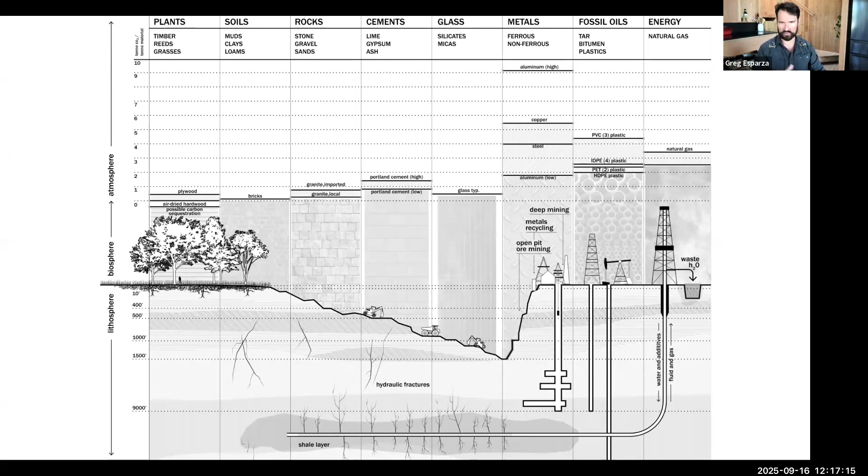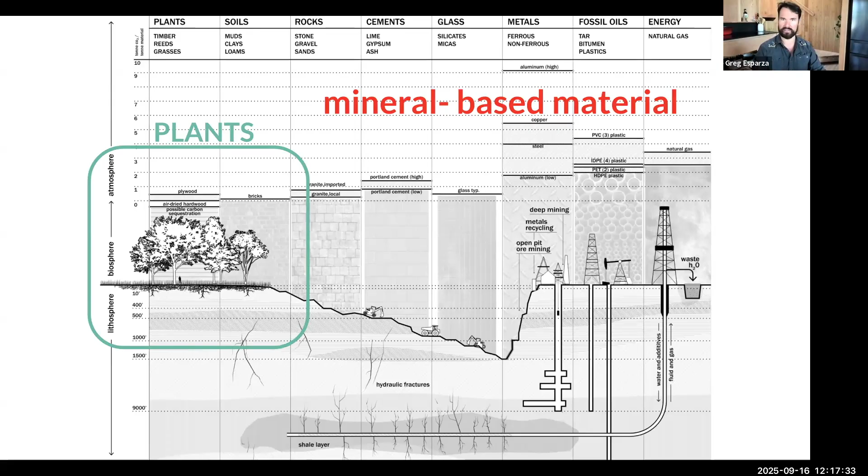So over here on the left, we have our plant-based building materials, and then over here on the right, we have kind of a stair step of mineral-based building materials, concluding with fossil fuel-based building materials, where we're going deep into the earth to extract petroleum. So where building materials come from, to a large degree, shapes a building's climate impact.

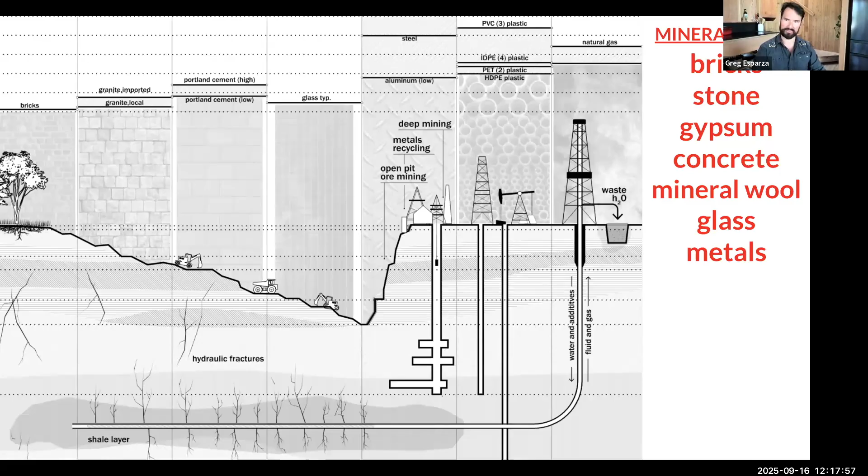So in that mineral-based section, you've got bricks, stone, gypsum, concrete. This is kind of moving from left to right. Mineral wool, glass, metals. And then we have our plastic section. So we've got things like PVC, LVT, polyurethane, latex paint, foams, all these things that are petrochemical derivatives.

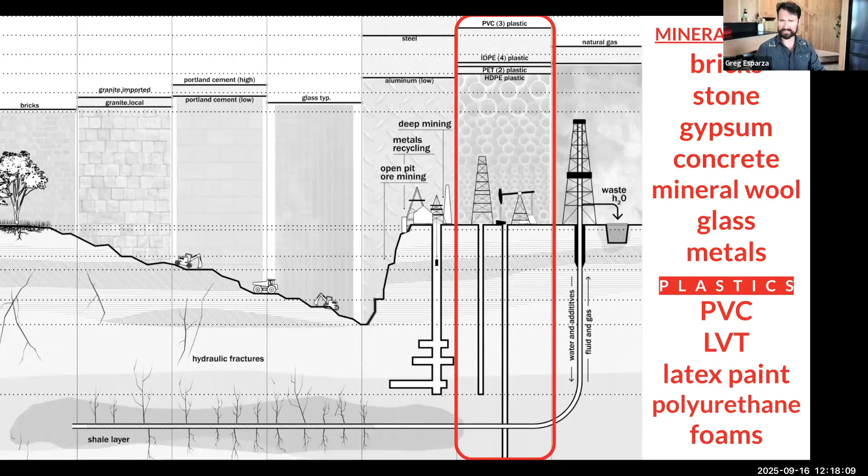Back to that kind of story theme, we've got kind of our farms, forests, and mines classifications here. But really since the 1950s, we had our farms, forests, and mines, but now we have kind of the new plastics addition to the Three Little Pigs plus Barbie Dreamhouse kind of classification of houses.

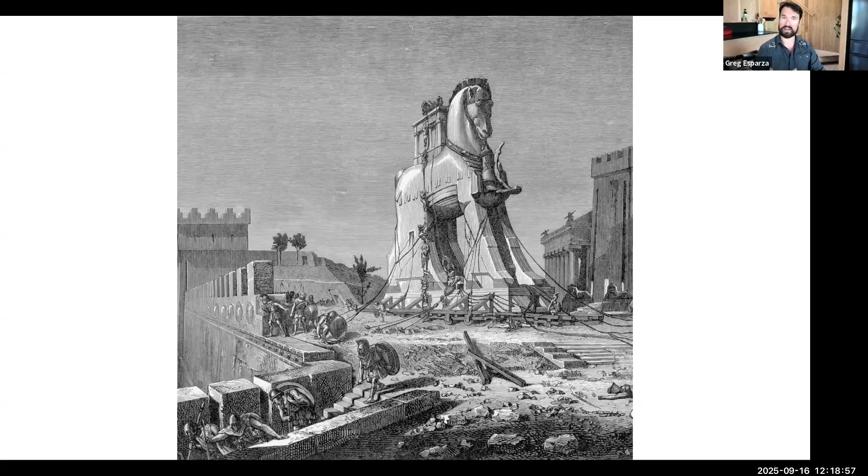Yeah, so the thing with houses is that houses are kind of like a Trojan horse where they're bringing a lot of different chemicals and compounds into the spaces that we live in and breathe in. And plastics in particular, along with other materials like asbestos, back in the day, et cetera. These things are materials that can hide toxics right under our noses.

So as I mentioned, from Austin, I'm a born and bred Texan. So this infographic from Dow Chemical from the 40s is a really nice distillation of how a petrochemical process works. So in this case, it's showing how saran wrap is made. So you've got petroleum and then chlorine, brine, and you have all of these different processes and energy that's put in at these different points

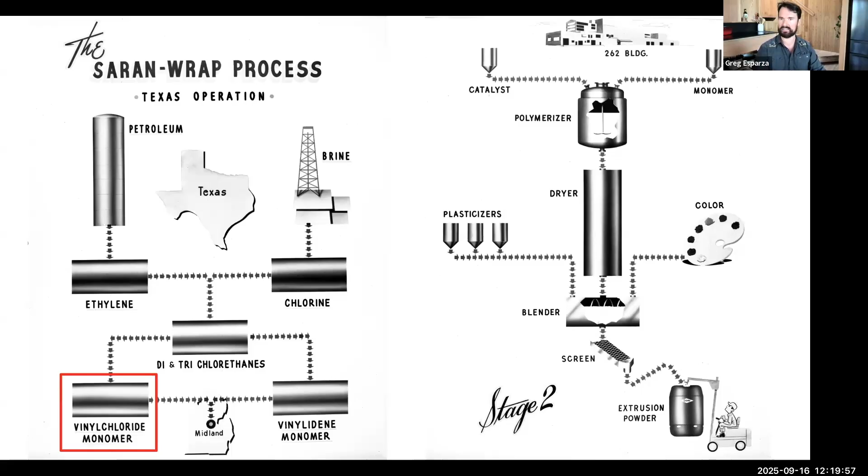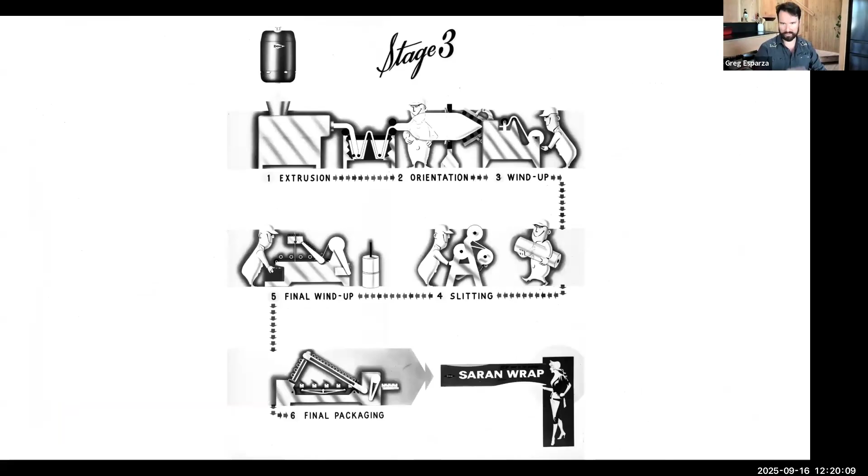working with chemicals at different levels of toxicity. So here's the vinyl chloride monomer. That's the base of PVC, LVT, and this kind of long industrial process that is a really amazing example of manufacturing technology to get to a nice and pretty end final product like Dow Saran wrap in this case.

So as it pertains to building, what happens if I put embodied carbon and health impact of materials first when designing a house? And so in the case of Austin, asking myself this question as it pertains to the Cross Cabin project. So I asked myself, what is our material baseline for a typical home design in Austin?

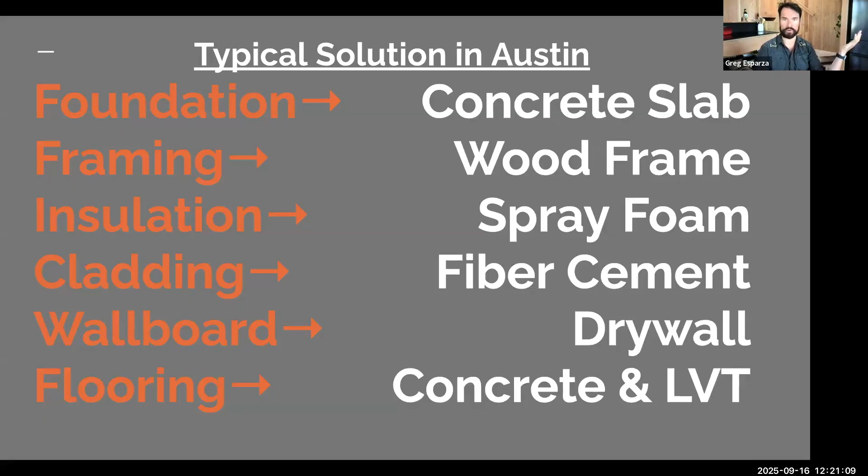So this is a very common spec house. This is down the street from where I am now. And these are the types of materials that are being used. So a typical solution in Austin would be a concrete slab foundation, stick framed. Insulation is most commonly spray foam. Cladding is typically fiber cement, drywall wallboard, and flooring. We're looking at concrete, LVT, some sort of polyurethane covered material. So we got almost all minerals with the exception of the plant-based wood frame.

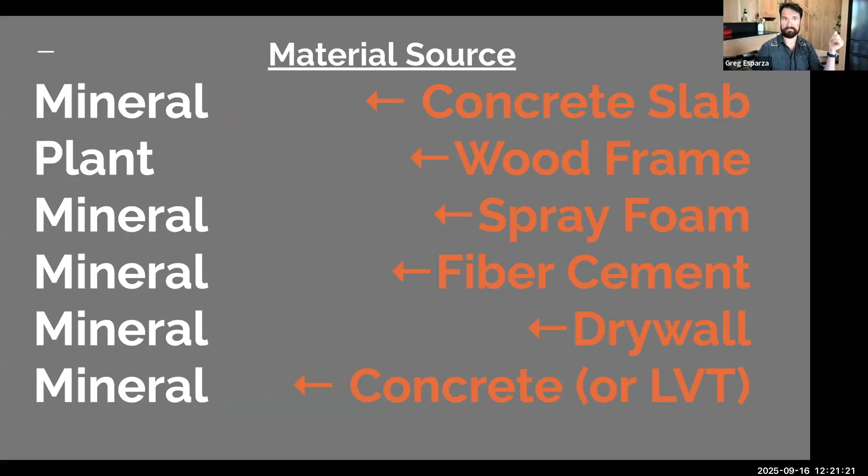So I thought about recontextualizing that for buildings. So what if we build with real materials, not too many, mostly plants? And real here, which I'm adding to Michael Pollan's food rules, is real as in not heavily processed. So like vegetables and wood, not Fritos and foam. And Fritos are delicious, but, in other words, no home Twinkies.

So the approach that I came up with for this project that I'm in right now is foundation using a steel pile and beam system, still a mineral-based product, still high embodied carbon, but we're using a lot less material and it has a high recycled content, very likely to be recycled at the end of its life, even now.

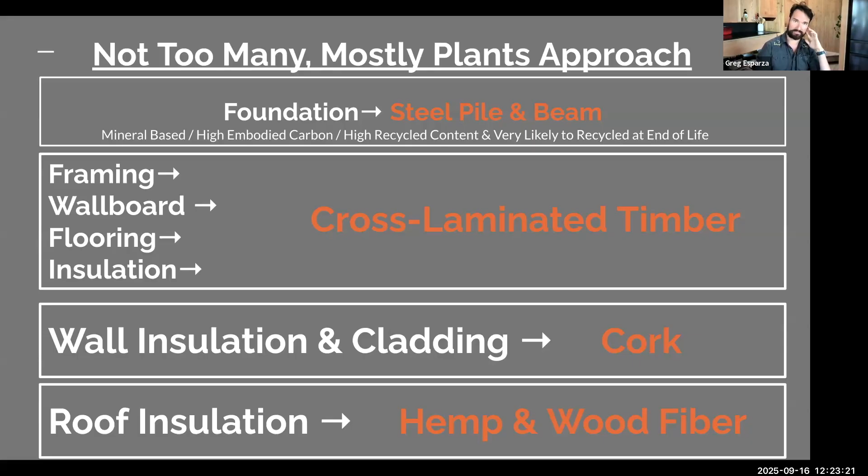So this is the wall assembly. This is kind of the mostly plants wall assembly. So we have 2 inches of expanded cork that's acting as our primary insulation and finish. And then we have 4 inches of cross-laminated timber. And this is sandwiching a self-adhered VaproShield, Wrap Shield SA air and water control layer.

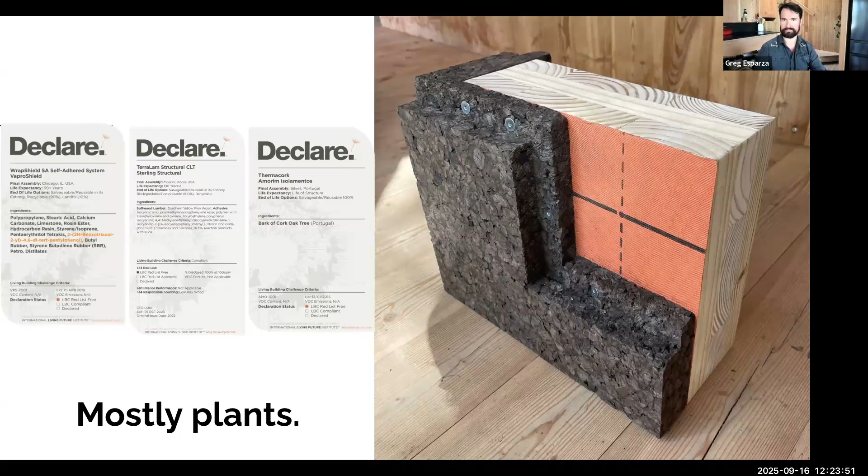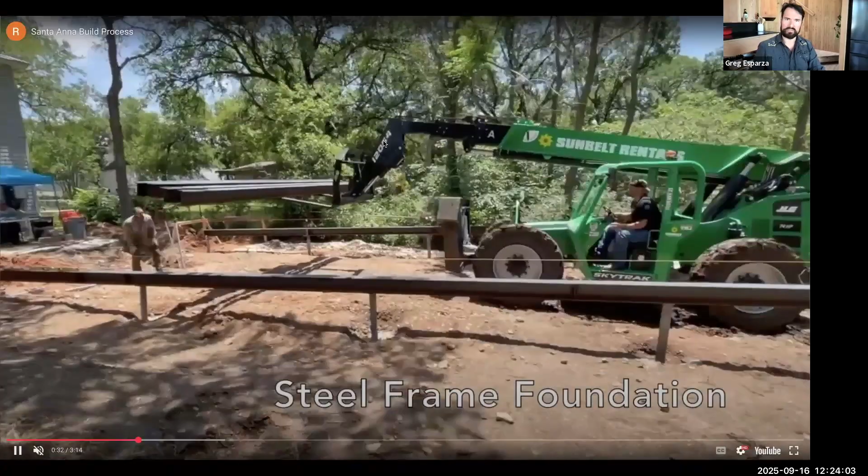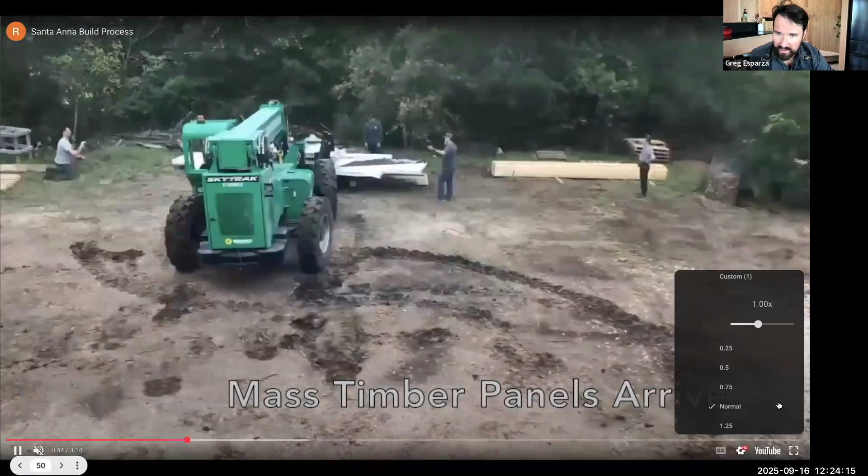Came out looking like this. Here's a video of the process. So we've got that steel frame foundation. Let's see if I can speed this up just slightly. So here the mass timber panels are arriving on site. Fortunately, in this case, we had a large side lot to stage on. Here you can see we're kind of putting them in place.

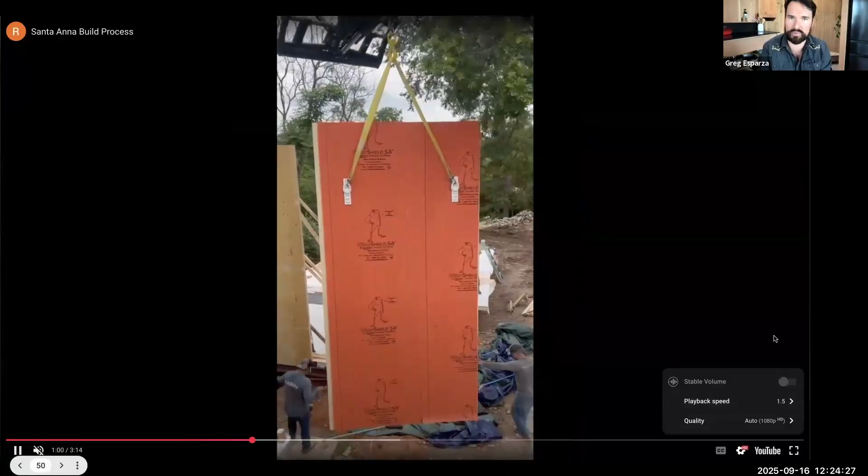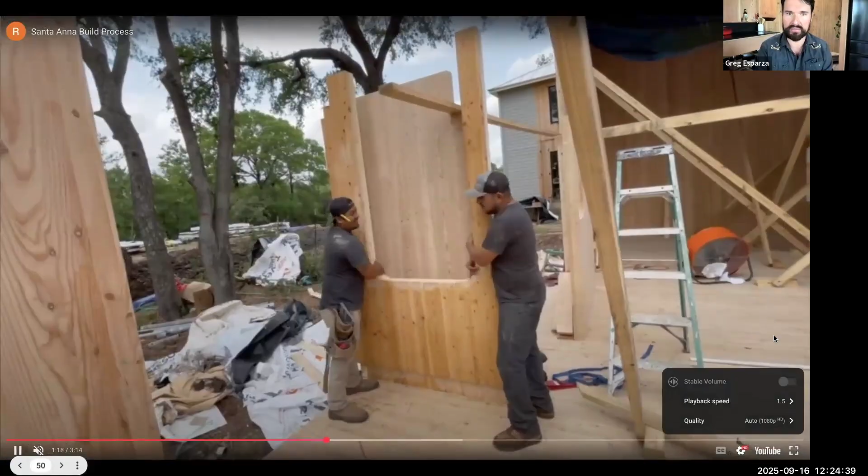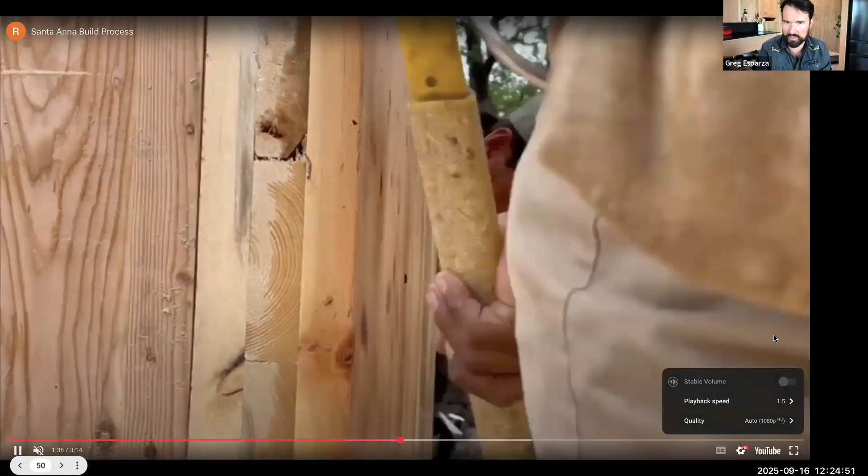In most cases, we put that water and air control along the panel prior to placing the panel and then picked up the seams with that same membrane, sort of taping the seams effectively. You can see the level of precision with the fabrication of the panels. So here we're kind of sliding that panel into place. That curved window opening was cut at the factory. So everything just sliding together.

Putting the roof panels on. You can see how thin they are. So that's a 3.5 inch panel. It's spanning 18 feet.

Greg, just a quick question. You said the walls are 4 inches of wood. Is it a solid 4 inches? Yes, it is a solid 4 inches. All right, that's great. A little bit later, maybe you can tell us why you opted for that when most are doing, you know, beams and then filling in the insulation on the inside. But anyway, I'll let you continue. I just thought that was interesting. I haven't seen that before.

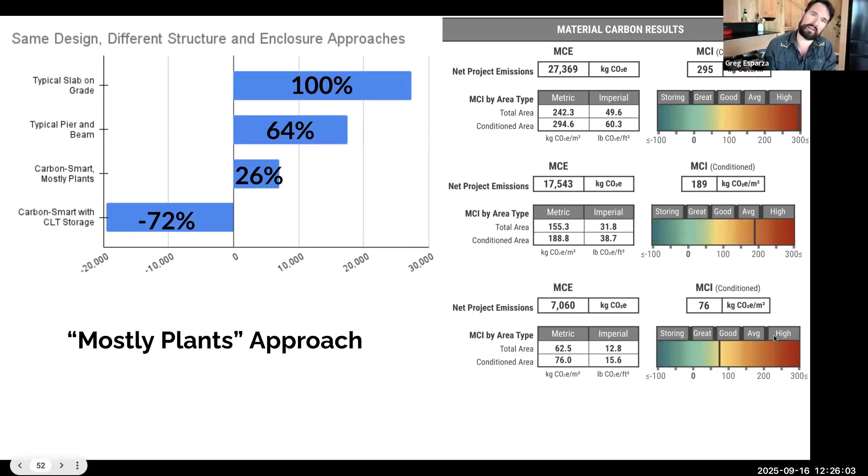Thanks. So what's the actual difference in carbon impact between typical and mostly plants approaches? So up here at the top, if we did a typical slab on grade, so concrete slab, spray foam, drywall, fiber cement, etc., that's kind of our baseline carbon impact for something that's the same size and shape of what I'm sitting in. So we'd be looking at 27,000 kilograms of carbon dioxide emitted from an embodied carbon standpoint. If we went to a pier and beam with the same kind of conventional materials, that would go down to 64. And then what we did goes down to 26% of that carbon impact.

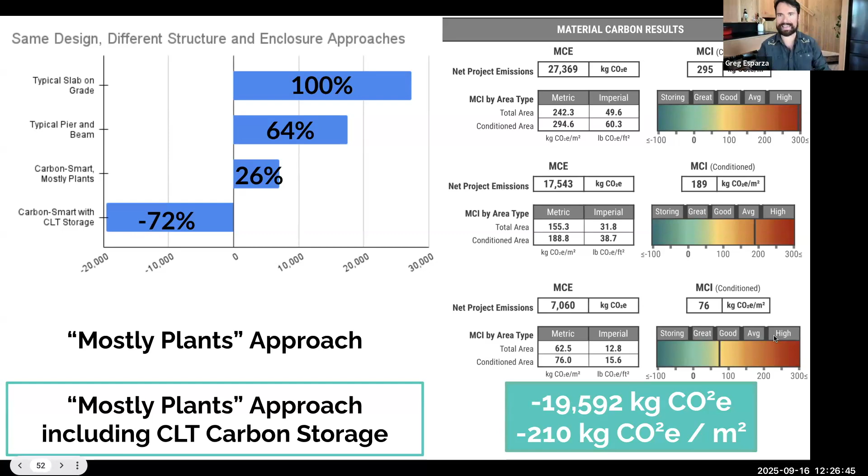And then if you include the biogenic carbon storage, or the carbon that's locked into the cross-laminated timber panels based on the life cycle analysis report, it would go into a negative 19,000 kilograms of carbon dioxide emitted from an embodied cradle to gate, cradle to factory gate standpoint.

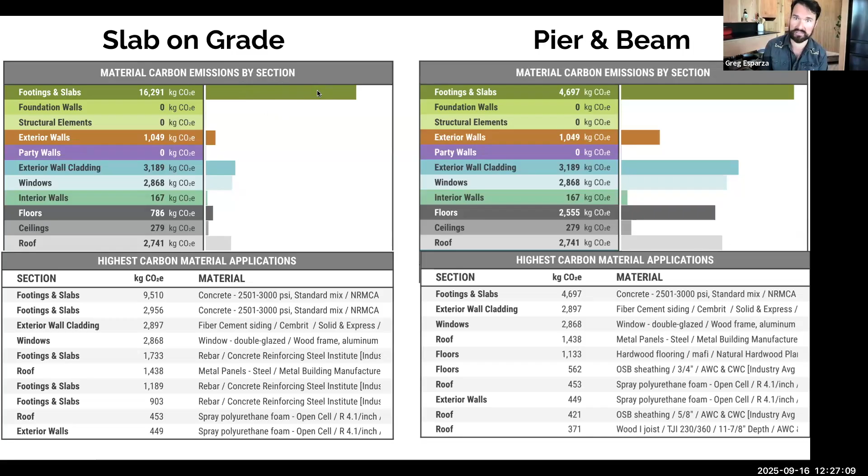So here, quickly, your slabs up at the left. This is the BEAM calculator that the Builders for Climate Action put out. Really cool tool, really easy to use. It's a Google Sheets based tool. You can see that concrete slab is by far the biggest part of the carbon emissions. And so these are the two conventional approaches.

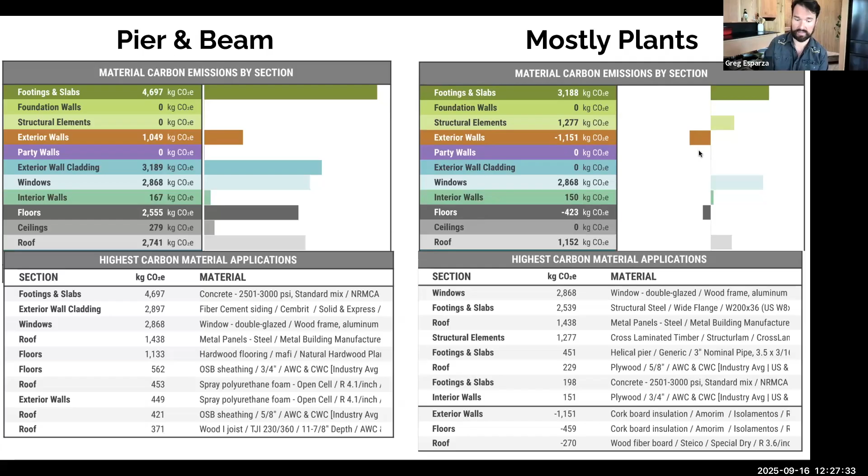So then with what we did, those helical piles are a lot less than a slab and even a little bit less than concrete piers. The exterior walls, there's significant carbon storage within the cork, as well as the wood fiber and the hemp. And then the cross-laminated timber biogenic carbon storage is on top of that.

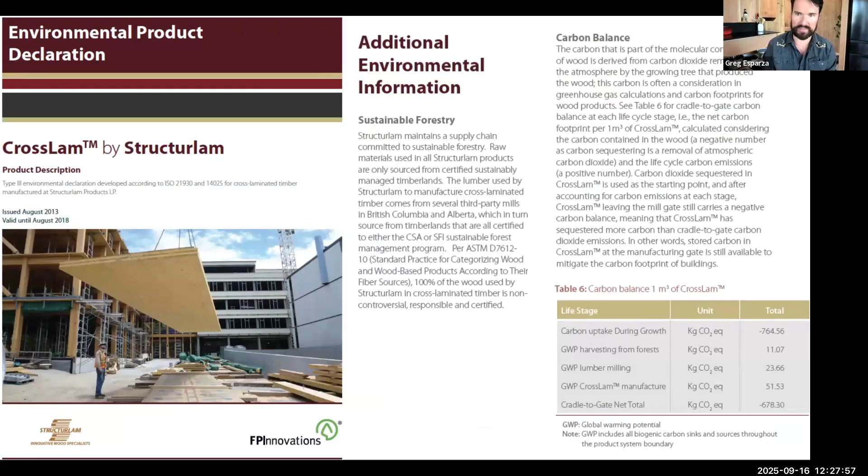Here's that LCA that kind of goes over that carbon uptake. So that carbon uptake, or that negative carbon impact of cross-laminated timber, is based on the amount of carbon out of the sky that is being absorbed through photosynthesis into the wood fiber. So I'll blow through this pretty quickly.

So alternate materials that we used on this project: cross-laminated timber. Pros are it is a carbon storing structural, but also a finished material. So everything I'm surrounded with here is mostly cross-laminated timber, and most of the walls and ceiling are unfinished, so it's a natural wood surface that's surrounding me right now. So it replaces structural framing and sheathing. It is factory computer fabricated and can replace drywall, paint, and finish floors.

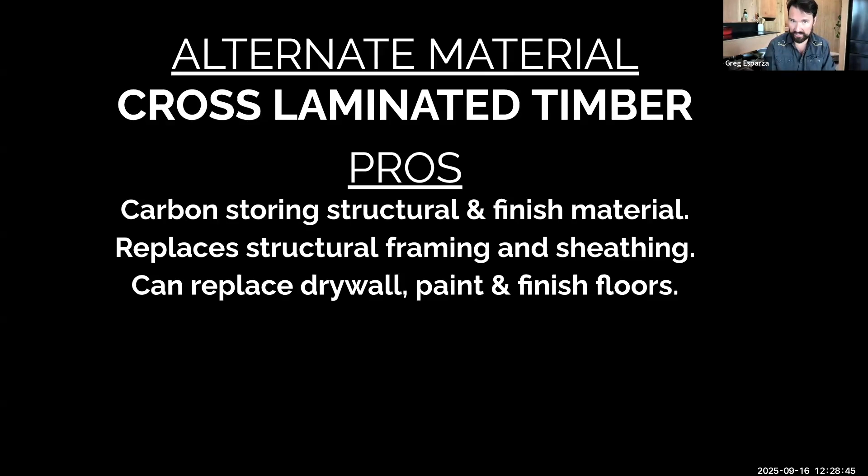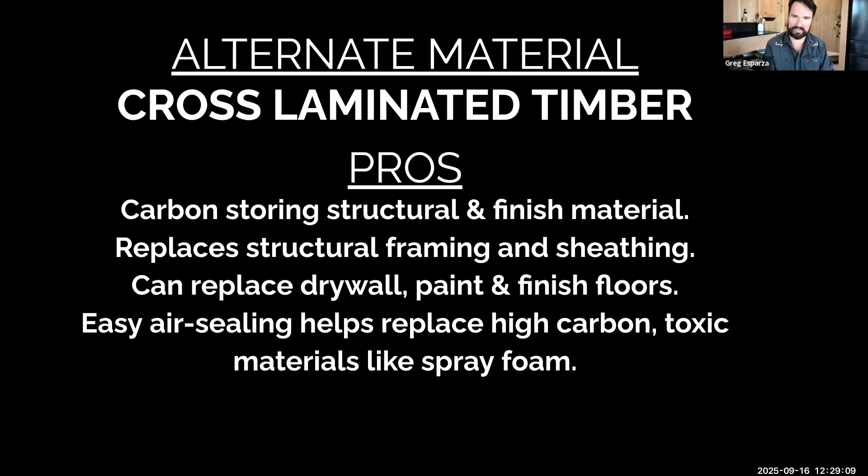It facilitates easier air sealing because everything fits together like a big piece of furniture. And the fact that we have no cavity insulation, that it's all continuous insulation on the outside, it helps replace relying on materials like spray foam for cavity insulation or for air sealing, even though nobody here is going to be using spray foam as a primary air seal, I'm guessing.

So yeah, cons of cross-laminated timber. There's complexity of the carbon accounting. The panelized approach requires a different design and construction process. And it also requires careful structural optimization and planning to be cost competitive.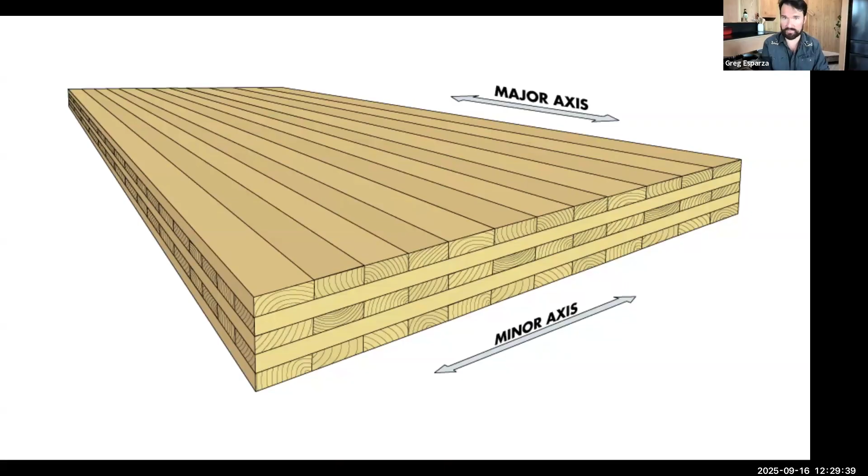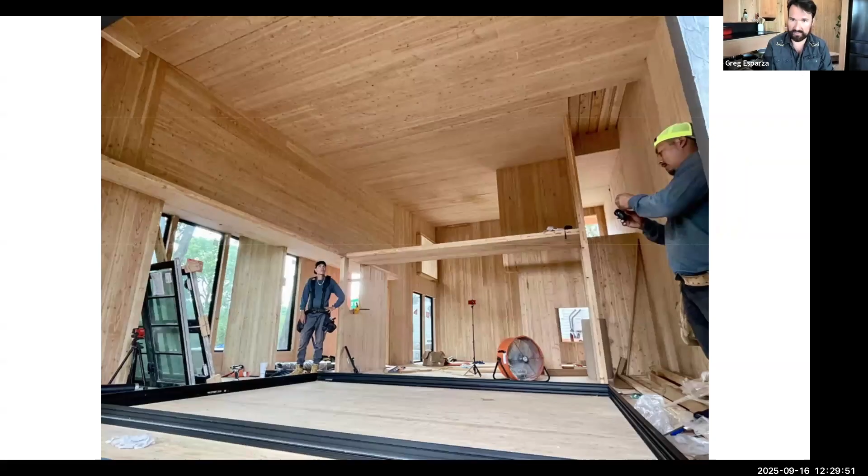So yeah, panel has a major axis and a minor axis. You get basically a shop model with all the pieces that comes from the fabricator or the panel manufacturer. This is what that looks like when it was all put together. Pretty much what I'm sitting in right now.

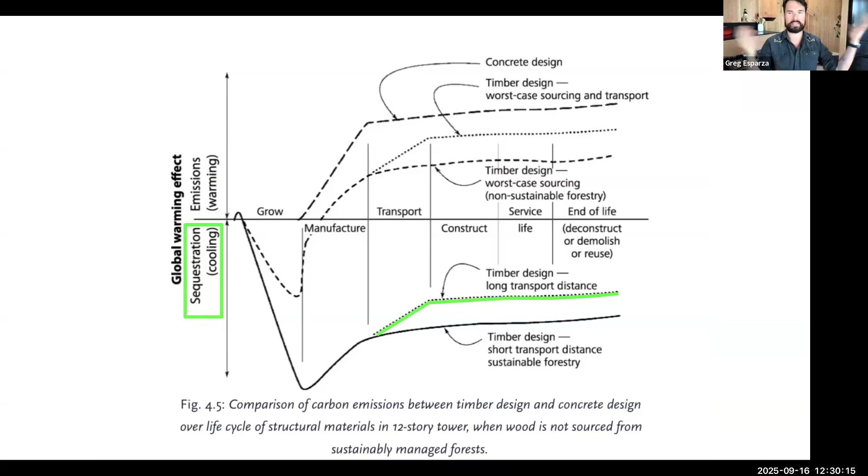Yeah, here's that carbon sequestration process. So it's during that growth that you get that carbon storage, and it can outweigh the carbon impact of manufacturing and transporting the wood. That carbon storage will only fully get released when wood decays at the end of its life. So, tree grows. If you harvest that wood and insert a building there, you're delaying this eventual decay of the wood when that stored carbon is released back into the atmosphere. That's part of the natural carbon cycle of a tree.

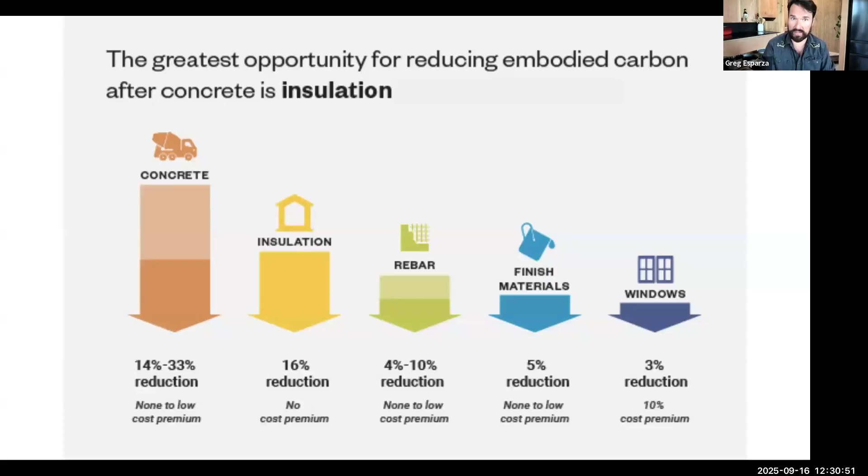So alternate materials, Amorim expanded cork insulation. Pros are it's a carbon negative, completely non-toxic material. It is literally just 100% cork bark. It is an almost completely unique cladding and insulation in one material. Biggest cons are really it's new and different. I'd never seen cork in person before using it on this project.

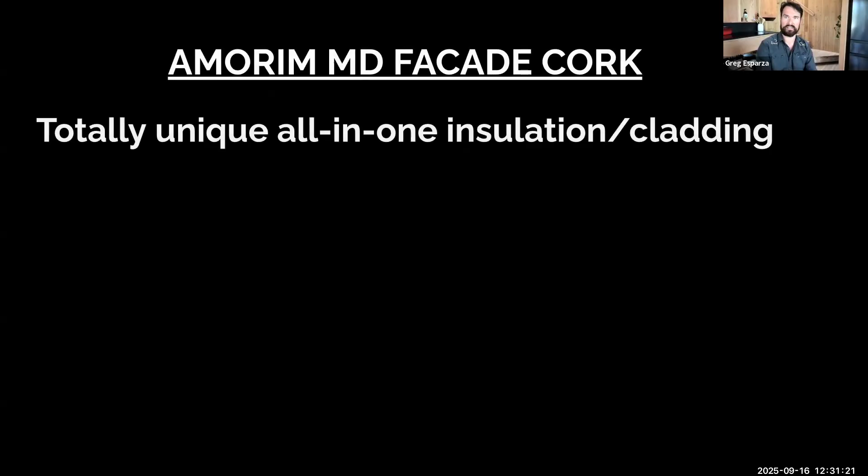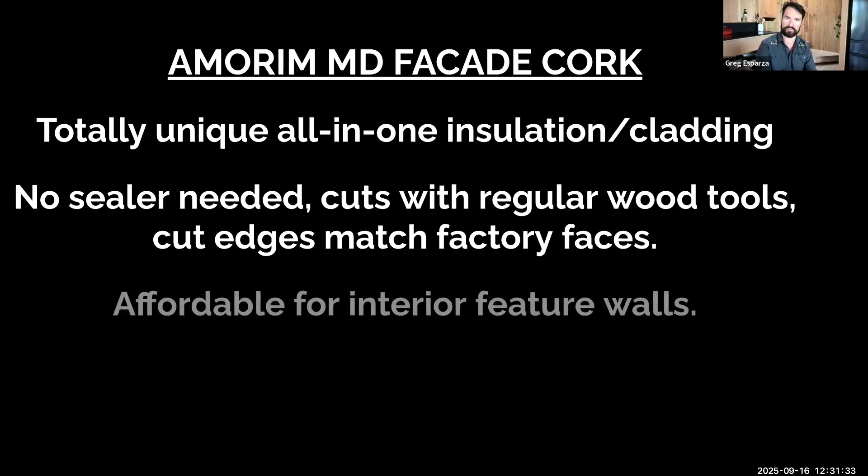Yeah, again, totally unique, all-in-one insulation and cladding. There's no sealer needed on the exterior. Cuts with regular wood tools. Cut edges match factory faces. It's the same material all the way through. It's very affordable for interior feature walls. And then it's an excellent performance and aesthetic value for exterior cladding when you consider that it's also your continuous insulation.

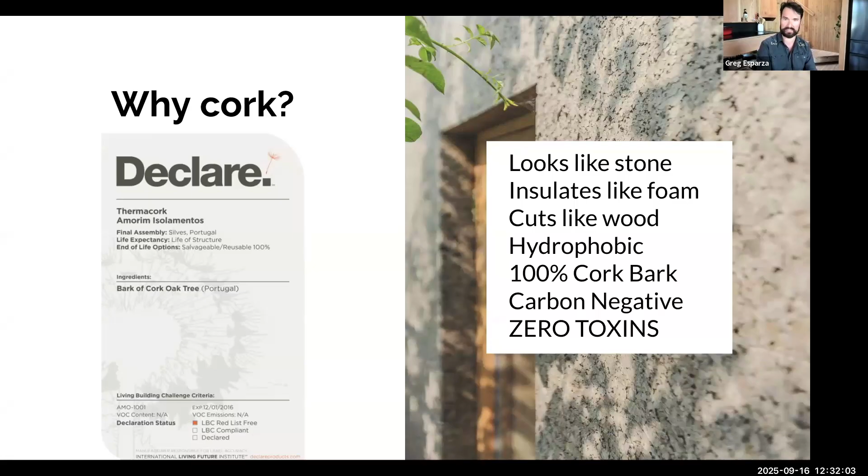So why cork? Cork, after it silvers, kind of looks like stone. It insulates like foam at between R-3.4 and R-4, depending on the density. Cuts like wood. It's hydrophobic. 100% cork bark. You can see over on the left, bark of cork oak tree. That's the only ingredient. It is carbon negative, and there's absolutely zero toxins.

Oh, damn. Well, I would need it to move fast anyways.

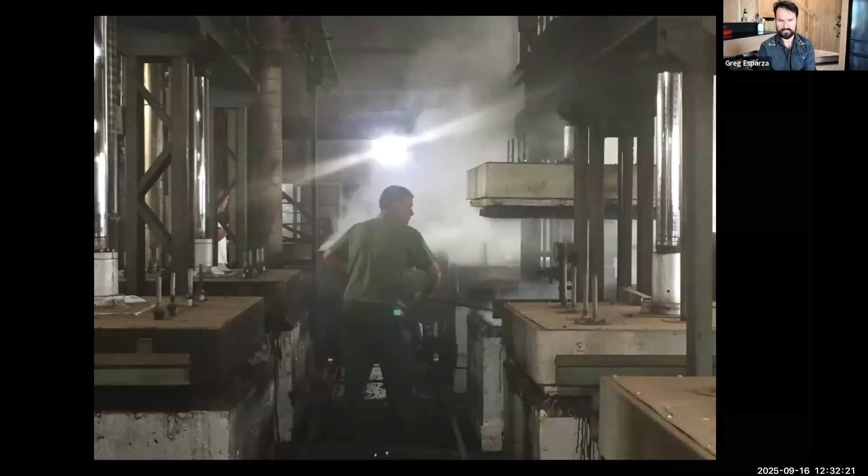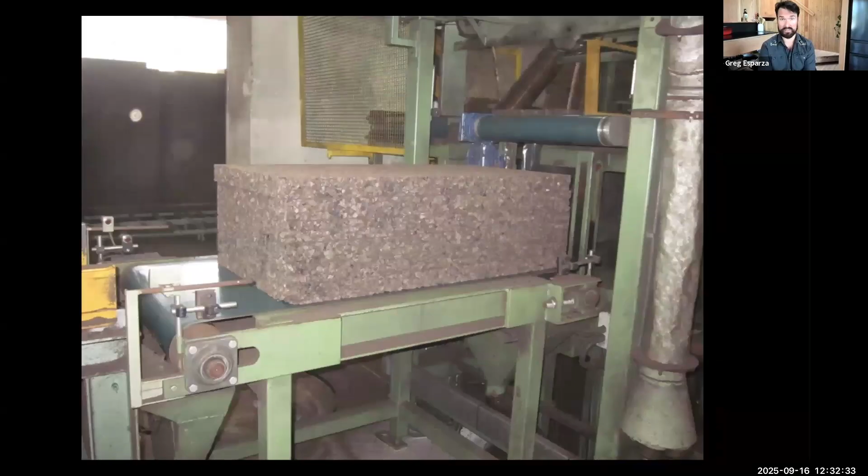Watching videos of the cork being harvested is really cool. So basically, cork trees, you take the bark off of, yeah. So you take the bark off the tree and they put it in this big mold that is heated at 660 degrees with steam. And then these big popcorn or larger size granules of cork bark, the sap liquefies, the cork bark expands, and then it holds everything together. Those blocks are cut into panels, and those panels can be used for interior and exterior cladding, very easy to work with.

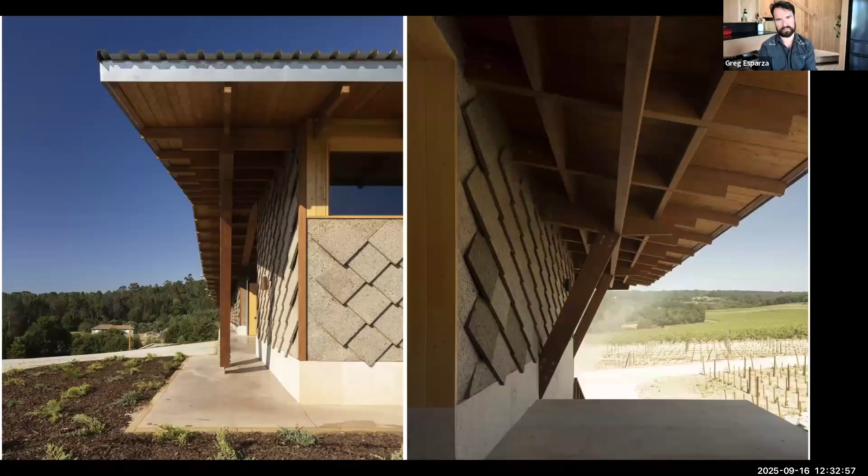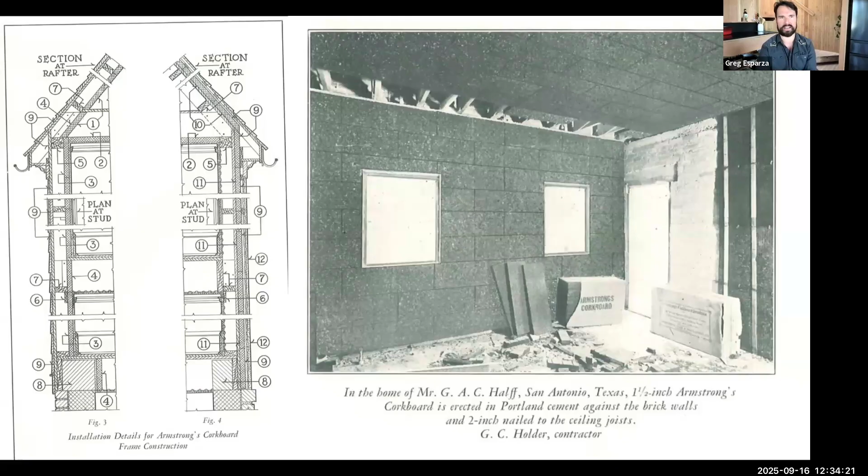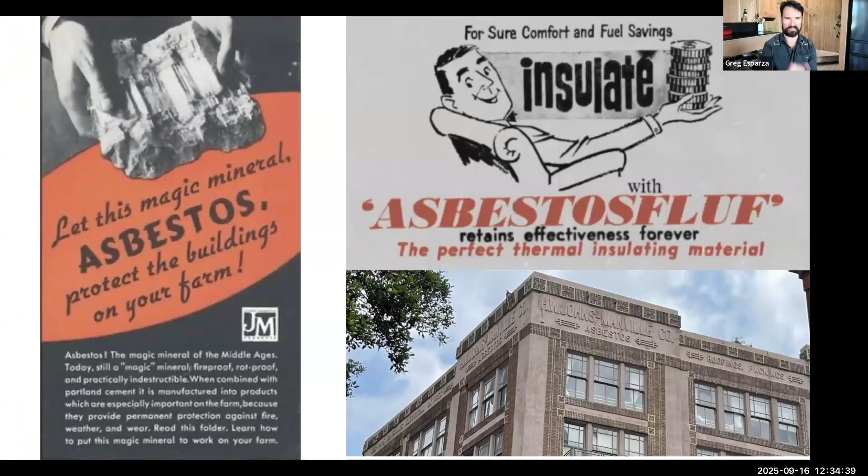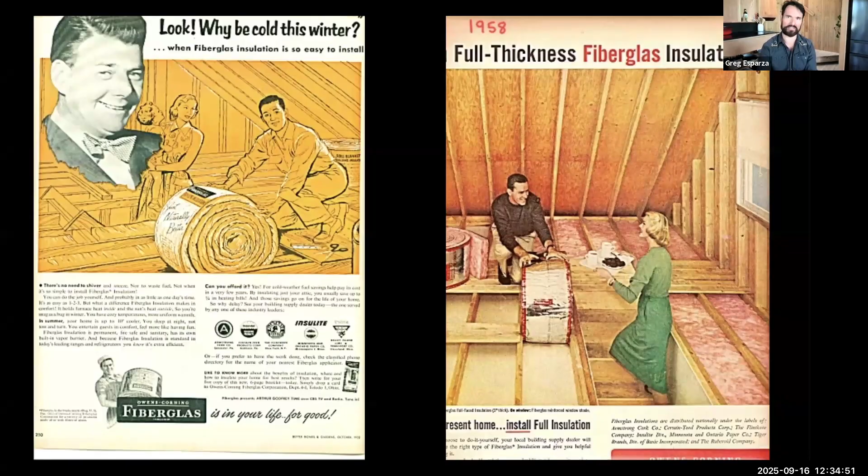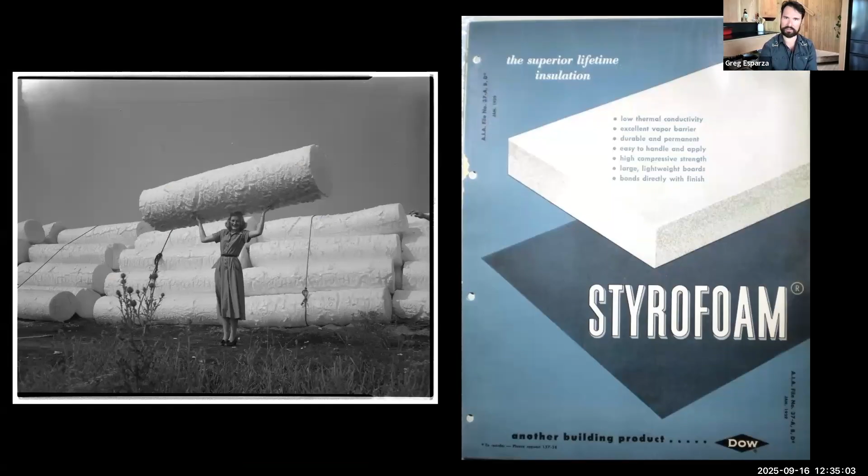Lasts forever, goes into fiberglass. It may or may not be Ronald Reagan, who's a big fan of fiberglass. You can eat tea and cookies while you're installing fiberglass, and then styrofoam. So these are marketing from the 40s and 50s. Styrofoam, the superior lifetime insulation. You can lift it over your head. Yeah. Again, there are some details of the house.

Very flexible material. Hemp fiber, carbon negative US grown material. It's fast growing, resilient rotation crop. Grows 8 feet tall in 3 months. Cons, new and different. Wood fiber insulation, pros, carbon negative, US made, non-toxic material, utilizes waste wood fiber or waste sawdust from sawmills in Maine. It's a carbon footprint home run. They are making loose fill, batt and, as of the end of this year, board. It has unique performance benefits in terms of its thermal inertia. Main cons, new and different.

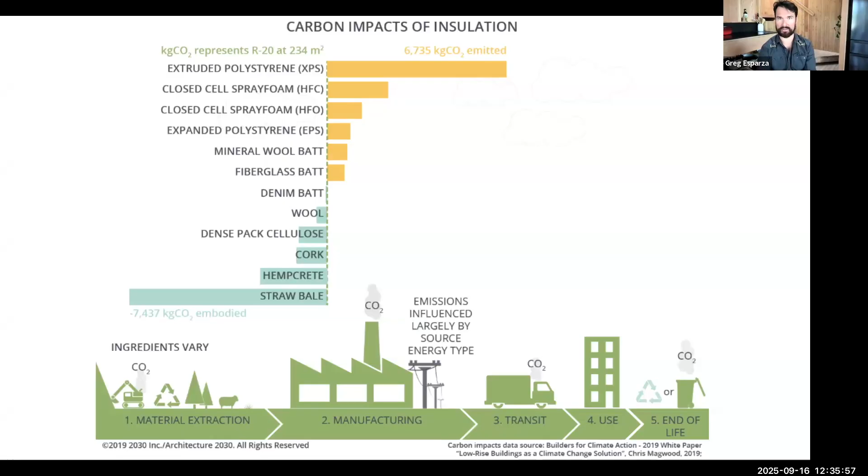Here you can see wool, cellulose, cork, hempcrete, straw bale down at the bottom. This carbon impact chart. Here, wood fiber over to the left. 2x6 wall comparison. So if you did, I think this is 5,000 square foot wall area, if you did it with open cell foam and then continuous EPS, including the embodied carbon of the plywood and the 2x6s, you'd be looking at 7,000 kilograms of carbon dioxide emitted.

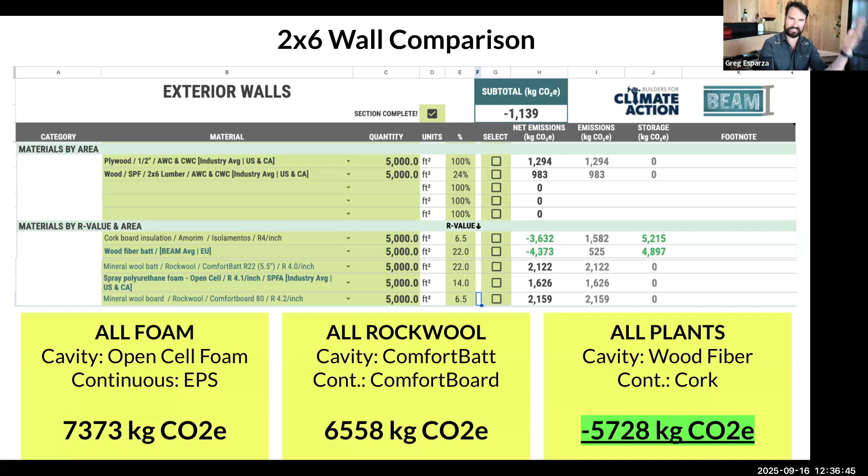If you did that with rock wool and comfort batt and comfort board, you'd be looking at 6,500 carbon dioxide emitted. If you did that with plants, and these are for equivalent R values, if you did it with wood fiber and cork, you would be looking at negative 5,728 kilograms carbon dioxide emitted. So just underlining insulation is a really big opportunity for creating carbon storage without sacrificing performance on projects.